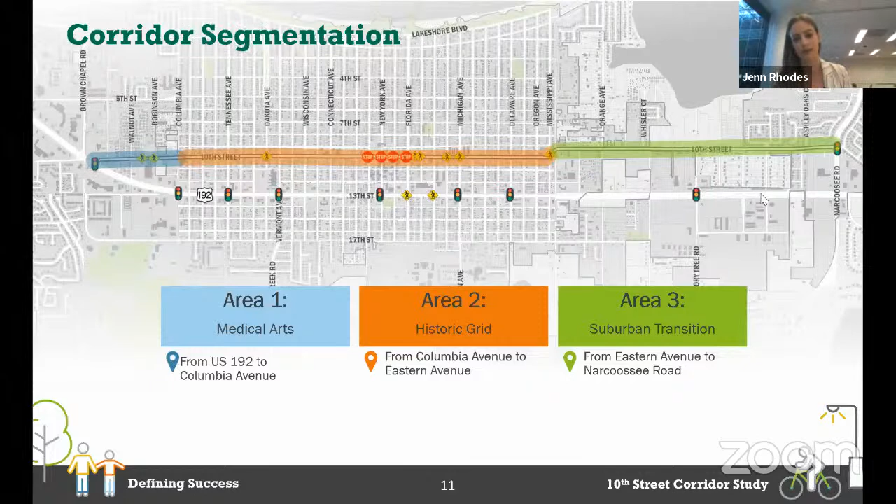As far as the typical sections for each of the segments, starting from the west, this is the first typical section from US 192 to Columbia Avenue. The lanes are pretty narrow out there, 9 to 10 foot lanes with no curb, gutter, or shoulder, they just kind of drop off. There's a 5-foot sidewalk on the north side for part of that segment, and there are some sidewalk gaps, and then there's a drainage swale on the south side.

That segment is within the St. Cloud Medical Arts Campus overlay, which takes up that whole square you can see on the screen. The portion of 10th Street between McKay Street and Columbia Avenue is within that campus overlay, so they've already identified a proposed or future typical section for that segment that looks at adding some on-street parking. We're going to try to take that into account and incorporate it where possible.

Moving on to the second segment, from the historic grid through downtown, we're still at a 50-foot right-of-way, but it widens out to have 8-foot parking lanes on each side, 11-foot lanes, and 10-foot sidewalks. For a small segment between Massachusetts Avenue and Florida Avenue, there are 90% design plans complete, so this is a rendering of what that would look like. They're bricking the streets, similar to the updates recently put in along New York Avenue, with nicer parallel parking, street trees, and maintaining the 10-foot sidewalk.

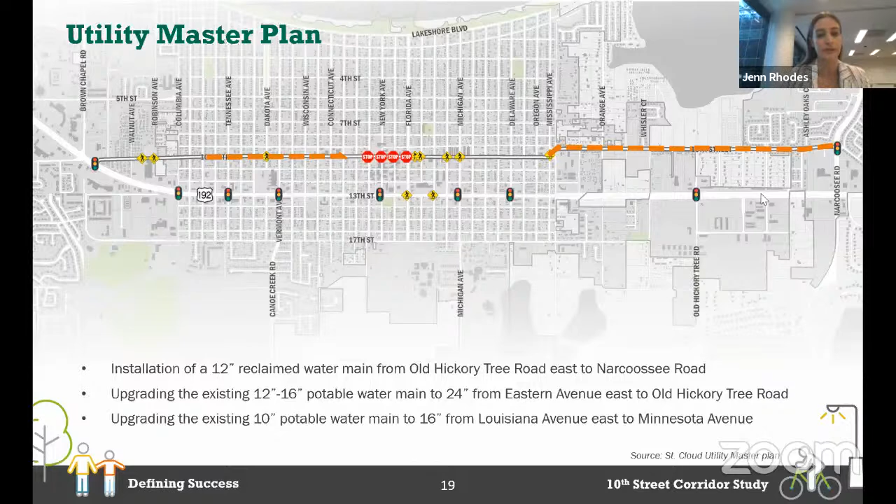And pass it back to Jeff.

Just a final thought on the utility master plan: I know we have someone from OUC on as well today, and we're excited about collaborating because perhaps on some of these studies we don't know that a utility has an improvement planned, and maybe we can leverage that investment they're going to make in that infrastructure capital project at the same time. This really could be one of the purposes of these meetings, so we're excited to have you.

The existing and future land use don't differ too much between the two. The only areas I'd highlight are a little bit more refined vision near the medical arts campus, as well as a bit more of a transition around downtown with some of the properties and land uses. To the very, very east end, there's that big pocket of commercial with the strip center.

From there, we'll talk about population demographics and really trying to understand that. We've used that information to help target our specific outreach to different groups and how they best receive their information, which has really played a big part in our outreach effort to date.

We do note that Osceola County has a larger Hispanic population, but I would note that St. Cloud is actually a little bit less than the county as a whole. But you can see where the pockets of density really are closer as you get closer to downtown.

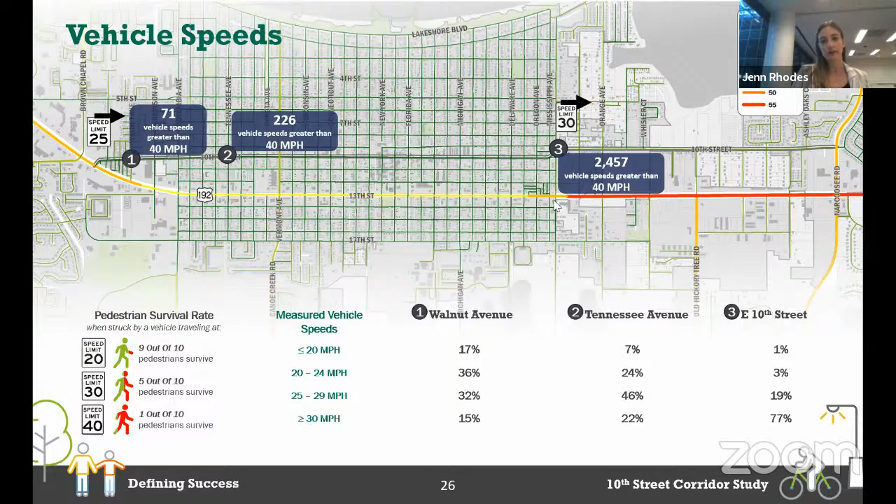Over 50% of the traffic is going over the speed limit, with special emphasis on the number of vehicles going over 40 miles per hour every single day. That number picks up at spot location 3, east of Eastern Avenue, where you have almost 2,500 vehicles a day going over 40 miles per hour. That's 2,500 times where, in the case of a pedestrian crossing, they likely would not survive. This highlights that speeding is an issue along this corridor, even with the narrow lanes that exist today.

For traffic patterns, MetroPlan has a license with StreetLight Data, so we're able to get a good assessment of how the corridor is being used. Not a lot of traffic uses it as an entire through route or corridor; it's being used more as a collector, in combination with several other streets that predominantly feed it. For example, Columbia Avenue and Old Hickory Tree are major corridors people use to access 10th Street, as well as in the core, in the middle, and on each end at Narcoossee and over at 192 at the very western end.

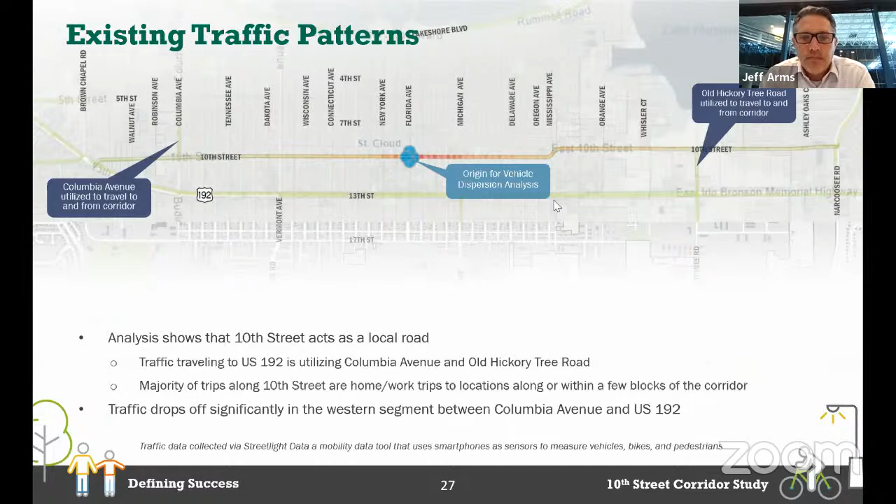For traffic volumes, you can see the range Jen talked about. The takeaway is we looked at both existing traffic and future traffic growth and patterns, and it's been pretty flat as far as volume growth. So we're not looking at needing to add lanes or increase capacity on the roadway. There aren't locations where we need to add turn lanes, even at critical intersections, and there aren't locations showing high levels of capacity constraints. It's really about accommodating the traffic that's there in a safer, lower-speed, more multimodal approach into the future.

You want to talk about the crashes, Jen? Sure. First we looked at all the crashes, and they were dispersed pretty regularly throughout the corridor at the 20 different intersections. Then we took another look just at the injury crashes, and there we could really see some hot spots, so those are intersections we want to pay special attention to in our recommendations moving forward. 34% of all injury crashes occurred at Columbia Avenue, 7% at Michigan Avenue, and 9% at Orange Avenue, so those 3 intersections really stand out when looking at just the injury crashes.

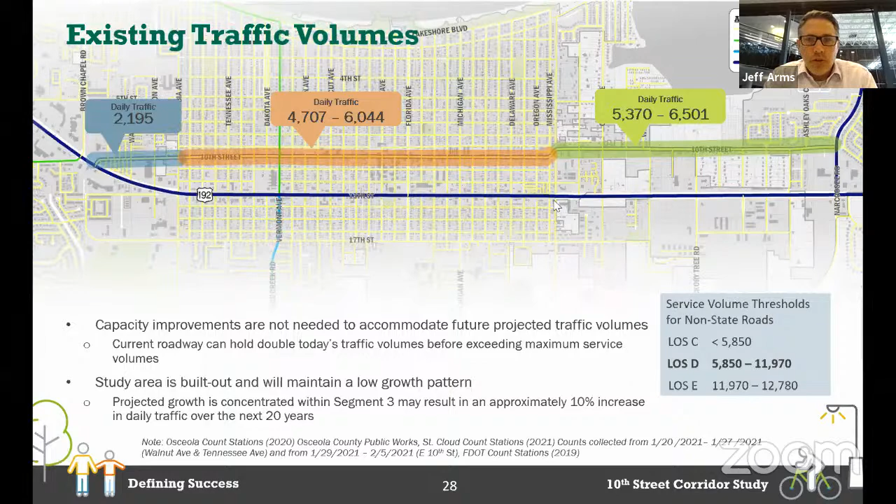That summarized some of what we looked at with existing conditions. At the same time, we had an online survey pushed out to the public, as well as a comment map using Wikimapping. We got 548 responses to that survey, and while it was pushed out through a variety of methods countywide, we did get targeted responses from people really using 10th Street. 80% of respondents said they travel regularly along 10th Street, and around 50% say they live or work on 10th Street.

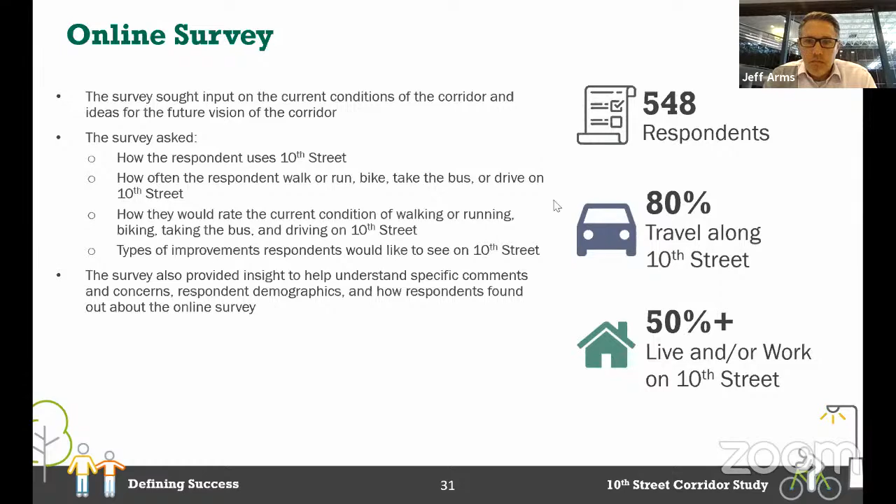Some of the ways we pushed out information about the survey was through social media, Facebook and Nextdoor. We also sent postcards to people within 300 feet of the corridor on both sides - 900 postcards went out that way. There was information about the survey in the City of St. Cloud newsletter, dynamic message boards announcing the survey, as well as other information notices through emails and the website.

One of the questions we asked was how they currently use 10th Street and how they would like to use it. We made a chart showing where the gap is, and you can really see the difference with both walking and riding a bike. Riding a bike is the most significant one, where 28% of respondents currently ride a bike on 10th Street, but 50% would really like to. So there's a lot of opportunity to improve conditions where people feel comfortable riding a bike on 10th Street.

Similarly, one question asked respondents to rank different issues from top priority to lowest priority for what the recommendation should be. In line with the last slide, the top issue they'd like to address is a place to safely ride a bike, followed closely by filling in gaps in the sidewalk, as well as improving the safety of crossing the street and car speeding.

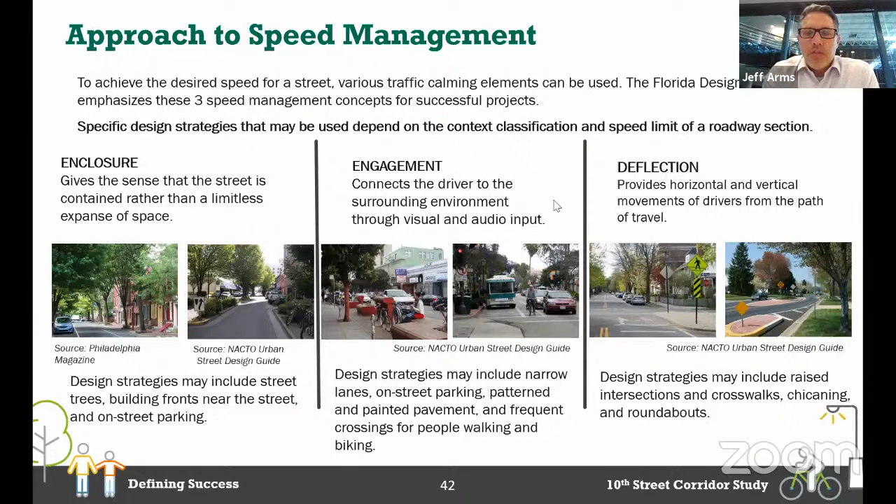So what do these different categories look like, what are some specific examples? Let me show you on the next slide. We tried to give you some different examples of how these categories would work, or some of the tools in the toolbox, so to speak. So we have speed humps, islands, roundabouts, bulb outs, on-street parking, narrowing lanes, short blocks, beacons and driver feedback signs.

It's always kind of tricky when we're talking about a 50-foot right-of-way. Sometimes some of the tools in the toolbox are harder to implement. For example, in a 50-foot right-of-way, roundabouts are a little more challenging. It might end up being more like a neighborhood traffic circle. And what does that look like?

Then a lot of the discussion too is on short blocks - shortening the length of the block. So maybe that's putting in more crosswalks across the corridor, more just reinforcing it's not one long continuous stretch.

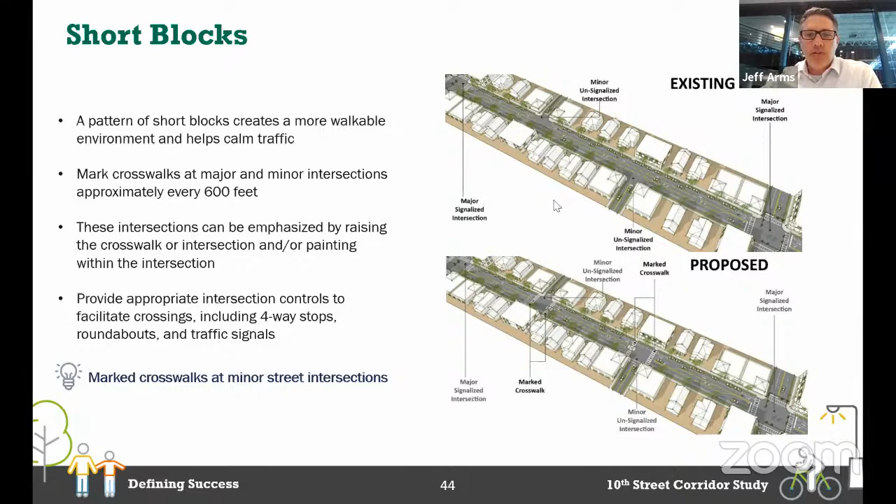That was a comment - yeah, I understand that comment about roundabouts and buses. We would certainly have to consider the design of roundabouts to accommodate buses along the corridor in future phases. I was just making the comment that this corridor being as narrow as it is makes it more challenging for roundabouts to even be a feasible solution compared to other places.

Some other multimodal strategies - we talk about different bicycle facilities, things we can do with transit stops, different painting of intersections, ped scale lighting, fewer driveway connections.

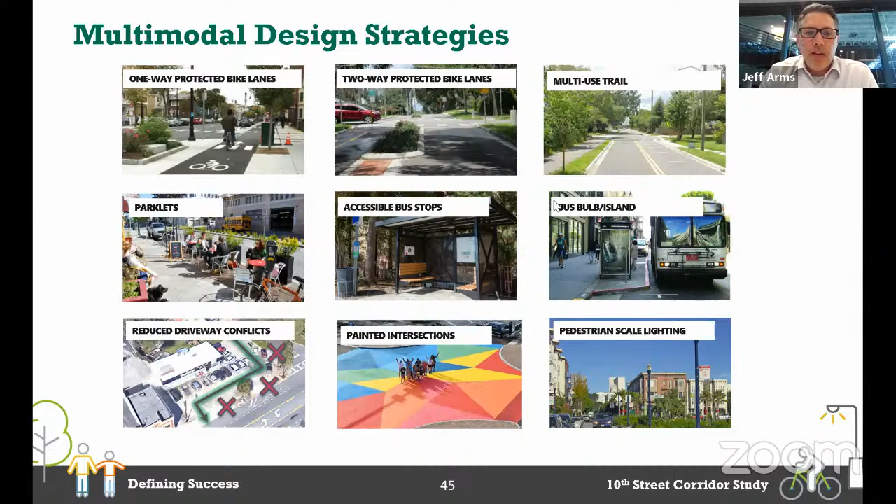So from there, we've covered most of our material. Next steps - we want to make sure we're considering everyone's input and ideas as we formally develop alternatives. What we've heard from the city is that something more urban, meaning curb and gutter type cross section without open swales, is the general direction we'd go. This project and what we're doing in this stage doesn't include a drainage study or detailed utility coordination.

So what we want to do is capture what all the issues and opportunities are, if that's the direction we're heading, so that when the project is developed at the next stage, we're aware of those and have almost like a good playbook of what challenges and opportunities there are going forward.

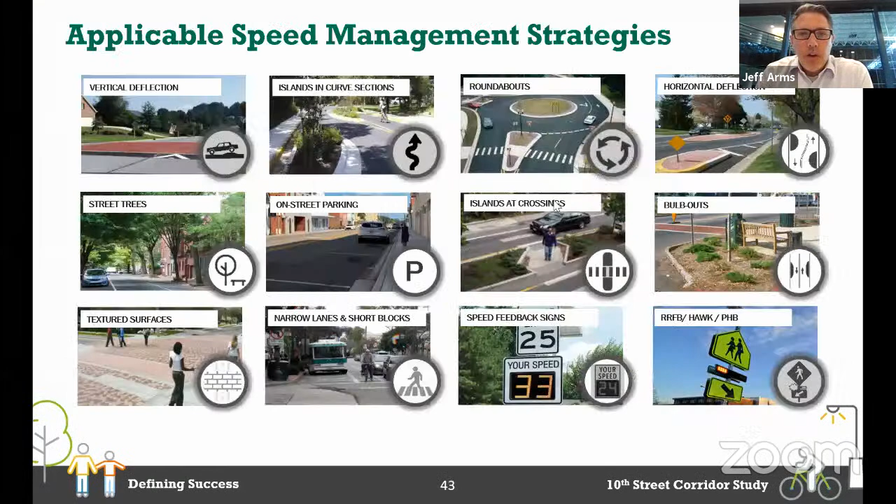With that, I can ask Alex to come back on and chime in, and then we could also go back to the goal slides. I can see some more chats of things people want to talk about. I think we can have people unmute themselves if we want a more open discussion. Or we could go back to the map and talk about different issues almost segment by segment.

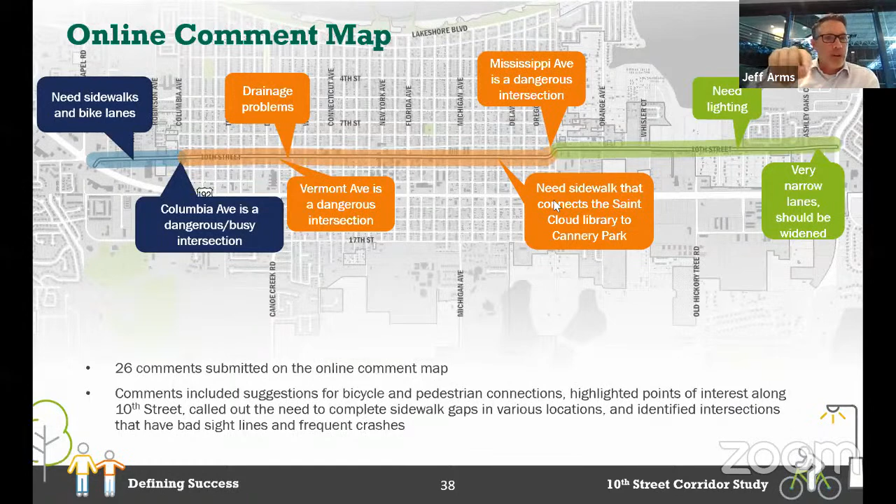We still have about an hour and a half left total, which I don't think we need, but we'd like to have some discussion. Maybe go to the map slide, Jen, like in the segments. Was this helpful? Or how about one of the ones with the stop signs, where you can see the pedestrian features? I forget which slide that is.

So that one, that works. This is a good one. I think this is a good segue point here. And obviously a little challenge with the virtual meeting, with this kind of typical roundtable approach.

But what we're really trying to gain here, as Jeff mentioned, is twofold: insights from your local knowledge and experience along the corridor that may not show up in the data, as we presented, very data informed, coordinated with interested parties. But there's always those insights that can be gained by coming together in this collaborative fashion. So if we can get those segment by segment, great, or any insights at all.

And then second are those goals and objectives, going back to those. So let's take it segment by segment first, but I also would like to build some consensus around those goals and objectives, because I believe they're very important, especially as we get into the latter steps of our work, where we'll use those as criteria in a rubric fashion to evaluate the different concepts being developed and review the different alternatives. So let's keep that in mind.

First, I guess we can take it from the top with insights, but I would like to get some feedback on those goals and objectives. And of course, we will send those out to the project visioning team members, give them a little time to digest. But any discussion and questions we have today would be great to take on. So, members, please, before I start picking on folks.

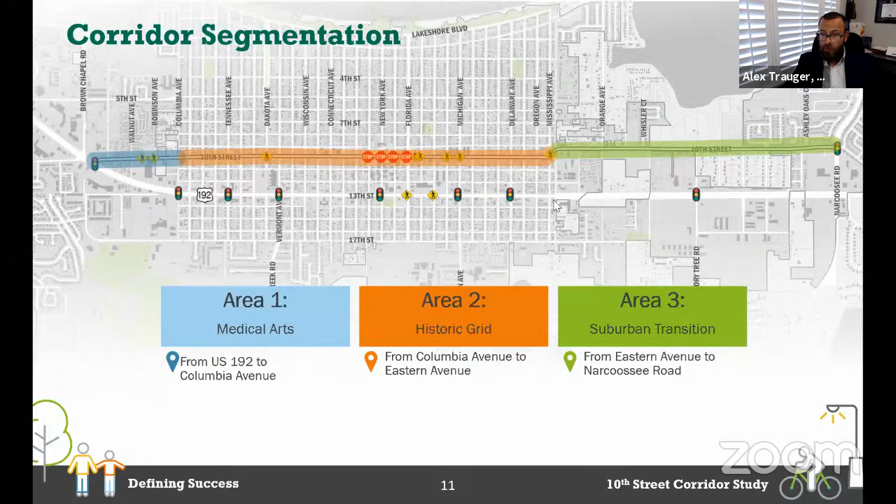I know Beverly's had some really great comments as it pertains to school bus operations on the corridor. So anyone else? Myles, Transit? Hate to pick on you, but I know you, so it's easy. You want to go to the transit one?

I just joined the meeting. I'm sorry.

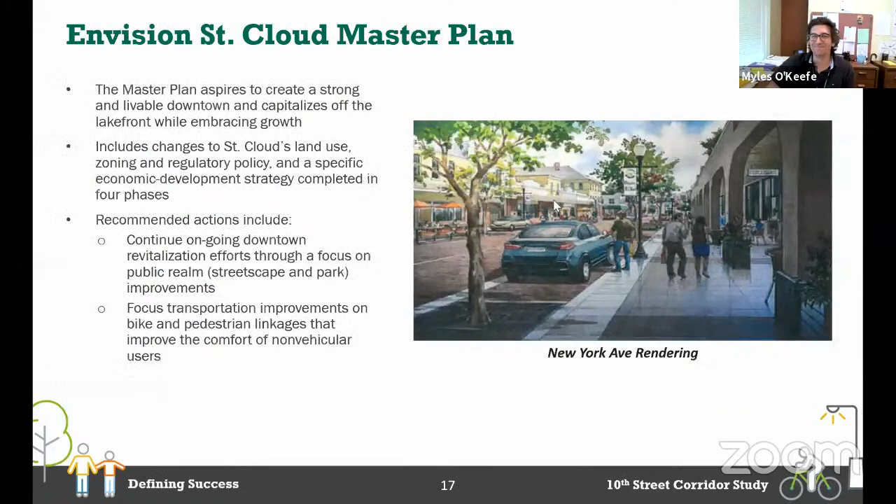This isn't fair. We'll put the couple transit slides on there, Myles. Let me get to the transit slide and we can give you a quick recap of what we said. So this is what we had for the transit slide. Oh, went too far, sorry.

It's currently the Lynx Route 10, pretty good headways and frequencies, 30 minutes and 1 hour on the weekends. But we did make a note that there was a potential, instead of following this looping route, to relocate it onto US 192, and then also the idea of maybe potentially providing a flex route. So anything you can add to that or thoughts about that?

Or just update us on the status of, is this still the current thinking? Yes, that adjustment is still the current thinking. In fact, we at Osceola County's request just put in a service development grant last week for those modifications.

So it would be straightening out Lynx 10 to stay along 192, and then a neighbor link that would provide demand response north and south of 192 to capture those areas vacated, pretty much all the way up to Lakeshore Boulevard, and then south down to 17th Street with the neighbor link. The 192 route, Lynx 10, would run to Narcoossee, and a new route would run along Narcoossee all the way up to the Nemours Hospital in Lake Nona. So there's potentially some big changes, but these would not occur if awarded the grant until December of '22.

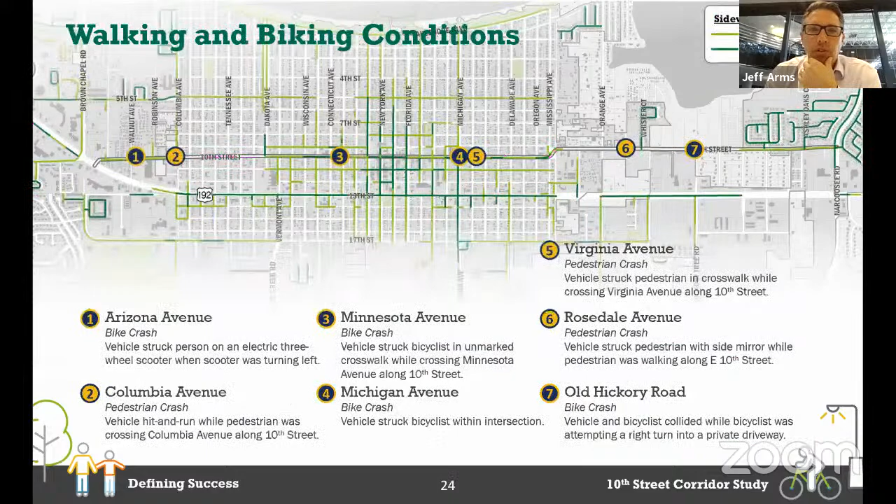Beverly did ask a question about better connections all the way to the lakeshore, aside from a few key corridors for bike ped. I know that's something the Envision St. Cloud Master Plan did have some of those connections. I think you had your key bike ped connections here. Those are the corridors, like Dakota has the bike trail that connects north-south. I think Florida Avenue would be and Delaware. Yep, the main one. All right, let's go back to the segment map, though.

Unless Myles has any last transit things. I'm just typing in the chat the road that it would be turning back on. It's Live Oak Boulevard is the street, right past Narcoossee. That's all. And I see Aaron's comment too, we'll touch on that when we get to that segment. That's great, thank you, Aaron.

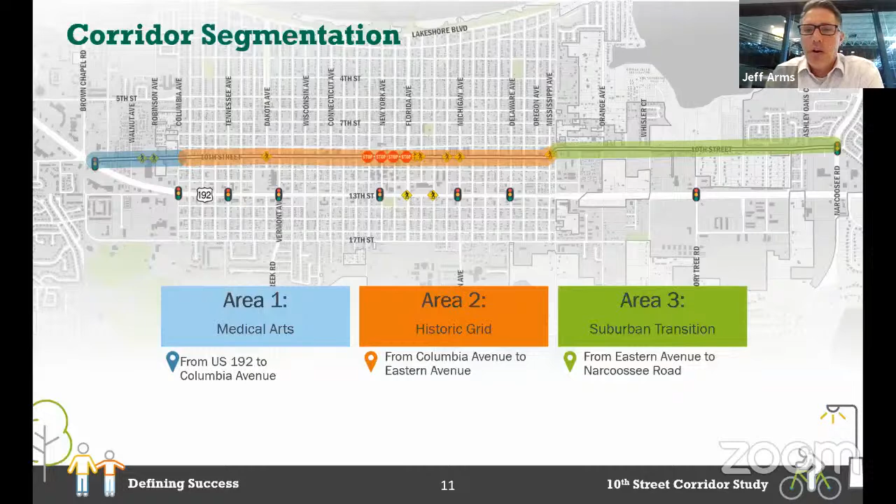Anything else? Go to the next slide, Jen, where we focus on the medical arts. This is the area with a lot of the mobile home parks, and it's transitioning to have a lot of redevelopment potential. Any other thoughts, feedback, ideas on that segment that anyone wants to chime in? I know Columbia is a location where we have a lot of concerns with that intersection.

I had some comments, this is Erin. Just the presence of that intersection at 192, it really is very understated. It's just right-in, right-out. You cannot make a left crossing 192, there's no signal, so it's just a very low-key impression. So the idea that it's this parallel corridor to 10th Street, for someone who's just traveling through, it doesn't give you that impression. And then when you're coming west, I noticed the pavement condition, because the curve is so steep that the pavement is degrading there, because everyone's braking while they're turning. So on 10th Street there, the condition of that pavement is really terrible. I'm wondering, I don't know the extent of the right of way there, if there's anything that can be done at that intersection that might resolve both of those things, or if anyone has talked about that yet.

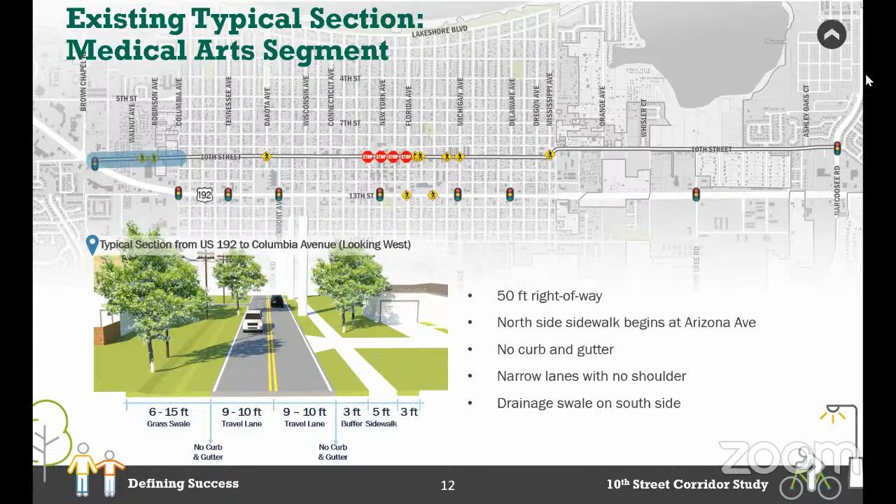But the plan we've got is to do it on both sides as a sidewalk. Well, we're not to the alternative formally yet. This is, I guess, for our study - we haven't looked at what we'd be recommending. This is what was recommended in the medical arts campus overlay. Between McKay Street and Columbia, they have this typical section we're showing on screen with on-street parking and a 5-foot sidewalk on both sides. I would anticipate we'd have some type of pedestrian facility on both sides.

But with a lot of the comments and feedback we've gotten, we can keep this in mind. We've talked about what a bike facility along the corridor would look like - would it be a parallel trail? Ideas like that are kind of where we'd start, since there's limited options in what you can do in a 50-foot right of way. The closest example I'm talking about would be like Bumby Avenue in Orlando - you know how there's the 10-foot path that runs parallel to Bumby itself.

Okay, keep going. So back to the area we're calling the historic grid - there's definitely a good connection at Dakota. That's kind of one of the first main connections going north, and taking into account some of those signalized access points and where the bus stops could be is going to be key. You can see where the very few stop signs are, except for in the core.

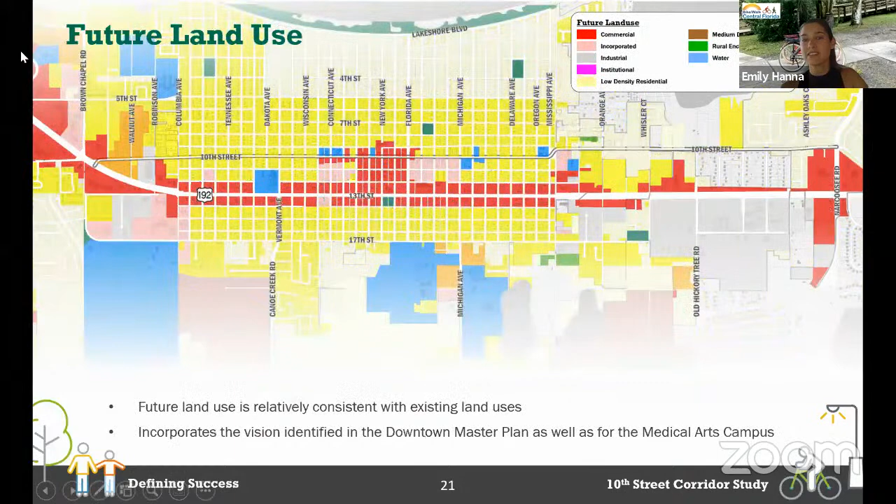Thanks, Emily. Can I just clarify when you said north-south with Florida Ave? I think Miles said their intent is to move the bus to 192. So I'm not sure, what were you talking about?

No, I was just trying to say align the bus stop, maybe put it on Florida Ave and 192, instead of having it off-centered right next to New York, maybe having it on Florida. That way those that ride transit can have a nice, safe facility to either walk or bike to get to downtown Lakeshore, instead of being offset.

Yeah, so the nice part is we get to pick new stop locations. If we're going to 192, we probably wouldn't have as many stops as you currently see now. So I made note, we will look to emphasize Florida as that stop location versus clustering them, because that allows us to put more amenities in one location instead of spreading things out. Probably better wayfinding signage too for those who ride transit but don't know where to go from there - that the Lakeshore Park is this direction, and it's all kind of seamless.

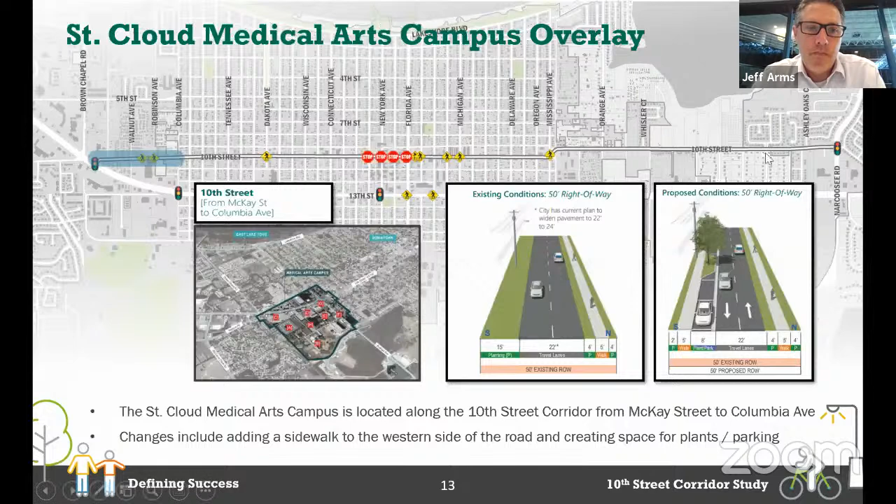All right, so this is segment 2, and if you remember, there's the smaller segment within that, between Massachusetts Avenue and Florida Avenue, where they have this 90% design plan. I think this is an interesting typical section to look at, to see if it makes sense to continue this typical section east and west a little bit further, just that core downtown segment, and also how you would transition from what we have proposed here into this. So that's the gap in between here to here.

Yeah, because when you do get outside of the core of downtown, you generally have a sidewalk on one side, typically, and two travel lanes. And you've got mailboxes and some driveways, but it's not commercial for all that long.

So there's been discussion of whether to still put on-street parking in front of the residential homes, and how you try, if we were to have some type of bike facility, you save a lot in efficiency if you put a trail in, because that also would be width you would have spent for a sidewalk. So by the time you try to do two bike lanes plus a sidewalk, you just start running out of room in 50 feet.

When you do the math of even two substandard 4-foot bike lanes, that gives you 8 feet, and then the sidewalk 5 feet. It just ends up being a lot of space.

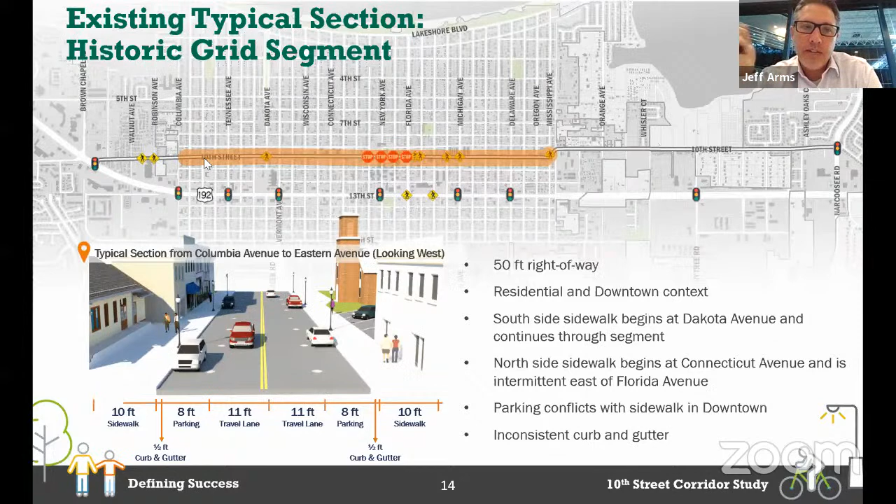So, all right, we'll keep going to the next one, and we can talk about each mode if we need to. So the last segment. No thoughts on segment? Yeah. Any other? We can always come back and talk mode specific, but I don't want to take up too much time.

Well, we have one thing to speak to regarding the zoning in the area on the downtown segment. We have unique zoning regulations that don't require the private sector to bear the load of parking on their lots, so the opportunity for on-street parking is pretty critical. The Central Business District does go one block west of Massachusetts over to Kentucky, and that's on the south side of 10th Street currently. That is just something, if we could capture that last block, I think would be important to the west.

I know there are some opportunities for shared parking agreements and things we're going to be delving into, a little bit east of Florida Ave, one or two blocks. So while the need for on-street parking isn't necessarily there, there are a bunch of churches on the south side of 10th, but we're looking at opportunities to share their parking lots when they're not in session.

So because of the way that we shut down the grid of the downtown area, a little bit of on-street parking just outside of Florida and Massachusetts would be helpful, within reason, within a block or two. But if we were to shut down the portion of the street that only had on-street parking on it, then we don't gain much during those events. So just something to keep in mind. Okay.

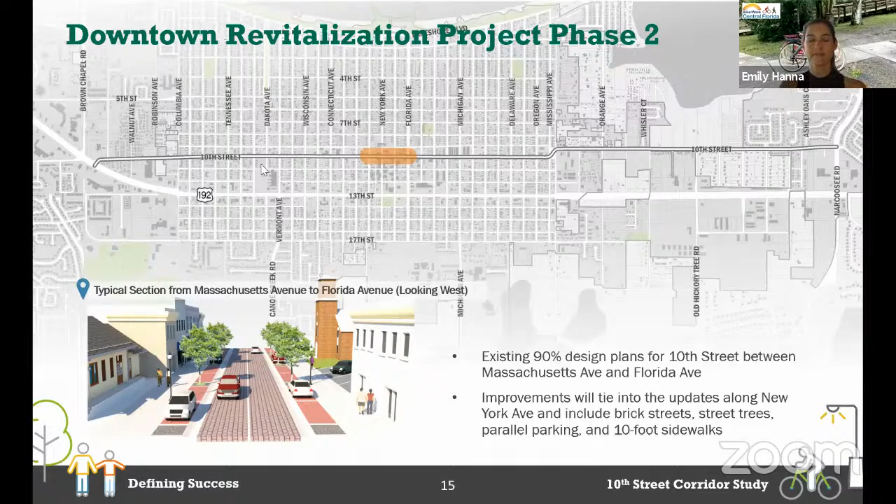Capture that. We have a trails plan that indicates a desire, although locally that plan's a little antiquated. At one point we considered putting a bicycle system on 11th. The challenge is, east to west, it's not a thoroughfare—it has a stop every single block. We could transition the stops, but you'd have to reconstruct every intersection to remove the hump, and it would be very complex, at least through the historic part.

So I don't know if there are opportunities east to west where, in areas that get down to limited right of way, you could do a parallel corridor and transition the bike lane on and off 10th while still keeping it moving east to west. In the past there's been some consideration of keeping them slightly separate and putting different types of facilities on different east-west corridors, but it's challenging to implement given how the intersections are currently constructed.

Costly. Aaron, you were on our walking audit—we talked about this very idea, and you brought up a lot of the same challenges. So that makes sense, we'll consider that too as part of the alternative. There's definitely an opportunity for a bike facility in segment 1 and 3, then transitioning into a parallel bike facility through segment 2, where you're swapping out that space for on-street parking.

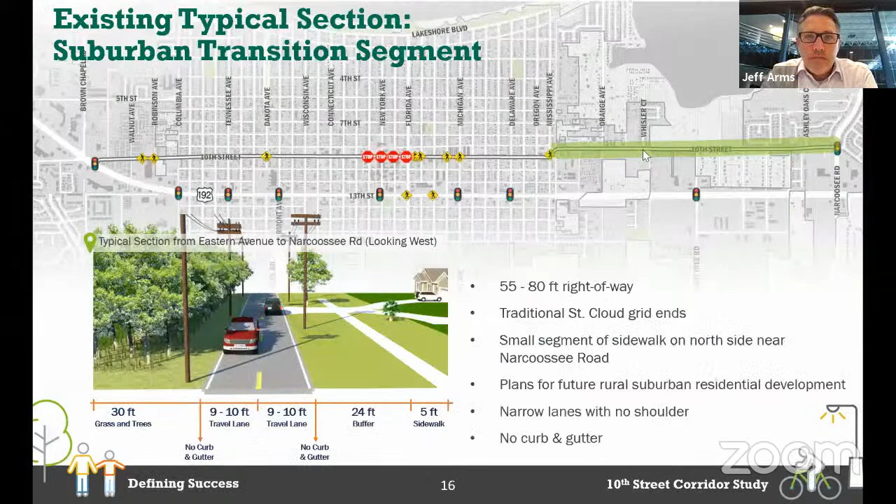Yeah, let's talk about the goals and objectives. As we look at these goals and objectives, I think what's most important are two things. One, if you have concern with anything listed here, any heartburn over anything that's there. And second, are we missing anything? These are grouped based on the highest goal areas based on the public feedback to date. After today, we'll send these out to the project visioning team for last call feedback. But if there's anything for the good of the order that you want to speak to today, we'll definitely take that into consideration.

One thing I'll get the conversation started with: I think I heard today the third bullet under economy, where we talked about considering bicycle pedestrian connectivity between 10th, adjacent neighborhoods, existing and future transit stops, and US 192. I would say we should add Lakeshore Boulevard, like Lakeshore park, and even opportunities for that adjacent parallel corridor as well, connections to maybe 11th Street. I think 11th would be an alternative, but we should call that out. Yeah, definitely Lakeshore, the connection to Lakeshore.

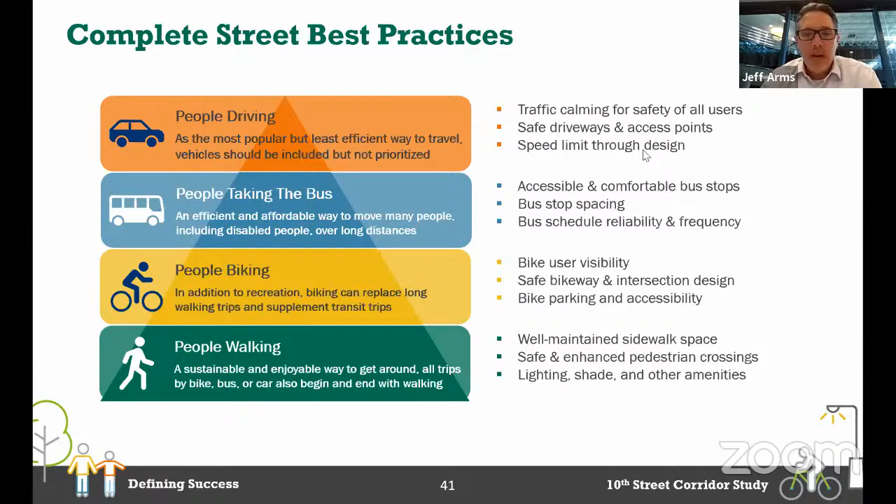I keep thinking about how we'll send this out, you can think of tweaks. I am trying to guard against creating a million objectives to the point where it's too hard to evaluate. So sometimes working that criteria within existing ones is a way to do it too. We're open to ideas.

That's a good point though. Something about seniors, I don't know if we really addressed that. I don't know if that's getting too specific, but I'll put a question mark up. I think vulnerable users is a good general term, because that covers everybody from 6 to 90, right? That covers everybody that's outside of a 2,000-pound vehicle. Does anyone have any others?

I have another question. Dirk, you brought up landscaping or trees. One of the things that's going to happen in the alternatives is we'll have a push and pull between a wider bike facility or more pavement width for users like bikes or peds, versus more room for trees. And we've got power lines, transmission poles, running down the corridor. Sometimes we pave over everything, put in the lanes we're going to put, make the trail as wide as it can be, and then we're left with no trees or landscaping, and we ask did we really achieve everything we wanted to? So when we evaluate and come up with alternatives, sometimes a narrower trail is better because you actually have a decent tree. At least that's my opinion. I don't know that it's really built into these criteria, but thoughts on where trees fit into the mix? I think we can have that in community, maybe.

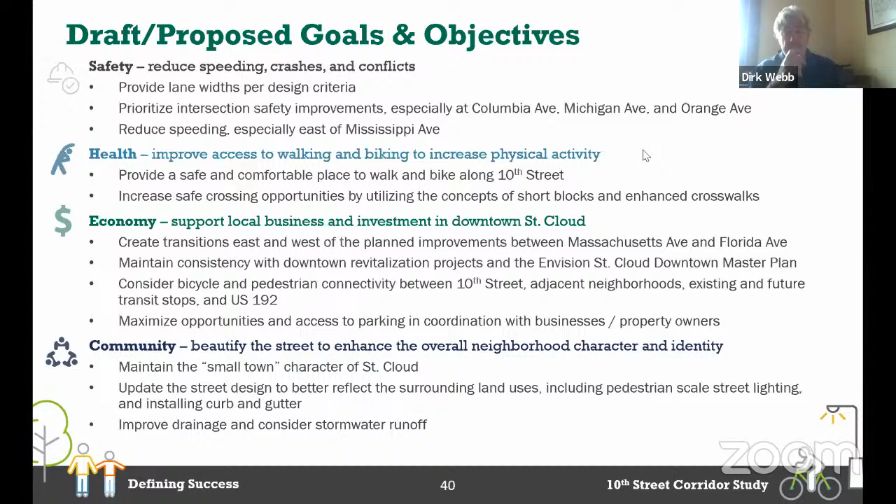Yeah, one of the reasons we added that one in there, in quotes too, was some of the concerns we had in the online survey - don't turn downtown St. Cloud into downtown Orlando, that kind of sentiment. A lot of people said we like our small town and want to maintain it, so we really wanted to capture that. Nothing we're going to recommend is in conflict with that idea - a little bit of a rivalry with Kissimmee there too, and in the comments, we don't want to be them, that type of thing.

I like when people take pride in their community. That speaks volumes. So my only concern is consistency. I don't know if that feels specific enough as a separate bullet under community, but it might, as long as we can still find a way to make it fit on one slide.

That was sort of my criteria of how many bullets, how many objectives are too many. Well, it's got to be on one slide. That's dangerous for an engineer, Jeff. I know, we could just make it smaller font and violate all of Cynthia's rules.

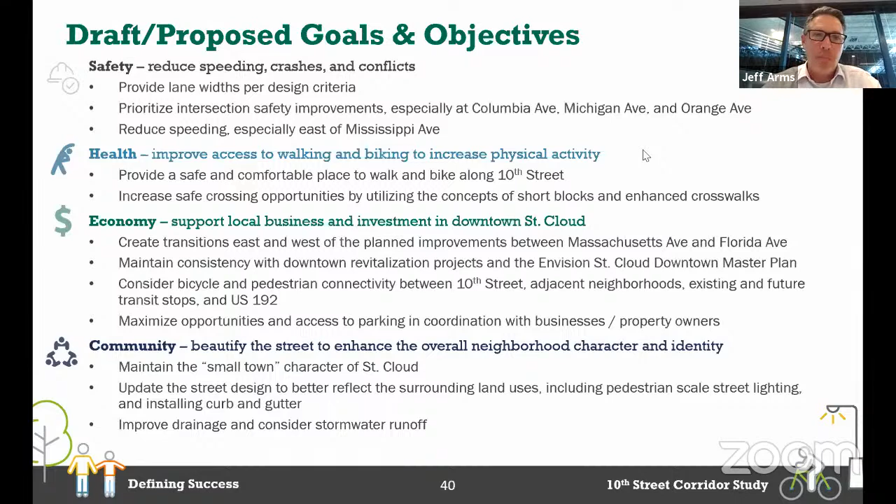On this, the way we're doing these reports, or the product working with Alice, is this is intended to be a little bit more content than a normal PowerPoint, so that if you get the slides later, you have the material to go back and explain to others what we're talking about. And then this is the documentation of the project, instead of giving you a separate standalone report that nobody remembers and reads as much. So it's a little bit of a hybrid.

I guess I'm curious. One of the things that I find that's done so well on 10th Street is the way they've done the landscaping is not huge masses of trees at the corners, but trees that are overhead. But if you've got to wait for a couple cars to pass, you're not standing in the sun.

And I'm curious if there's an opportunity to keep that kind of brand, the look of a pedestrian crossing, further east and west outside of the downtown. So it's almost like little entry features, but only at places like Dakota or Florida, where there might be more pedestrians crossing, and they would look forward and see that if I don't cross now, people will expect me at the next intersection.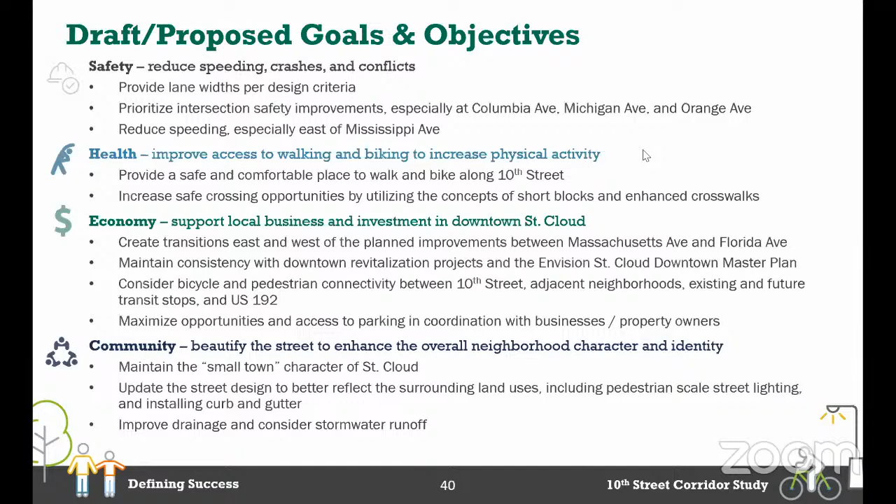Kind of highlighting those gateways of... where are we at?

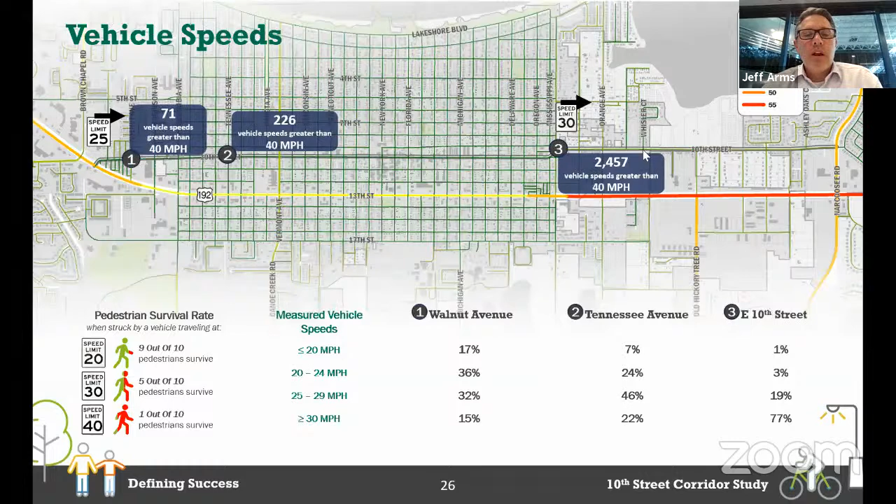Yeah, one of the things I think is kind of an interesting change is I feel like as engineers and planners, sometimes we've got to concentrate all the pedestrians to cross at certain locations so the drivers expect them at those locations.

But then I also find it interesting with the new DOT design manual, now they're reinforcing more crosswalks, more shorter blocks on the entire corridor. So in a way, DOT is recognizing that the design technique of just focusing the pedestrians at certain crossing locations is not necessarily the only way to go with the approach on the corridor.

Which I thought was kind of interesting, because if you look at the number of crosswalks, there's long stretches through here where there's not crosswalks. I think especially with the 25-mile-per-hour design speed, you really could be expecting pedestrian crossings kind of throughout this gridded network.

So I think we can move on. What we're going to do, as I mentioned before, is take the feedback we got from today, obviously put a summary together, which I'll talk about in a second. But as it relates to goals and objectives, we'll send you an updated version based on today's discussion, and we'll get your feedback on that, and we'll provide some context as well. So I think that was some good additions and insights there, to help us provide a little more focus to the work we're doing.

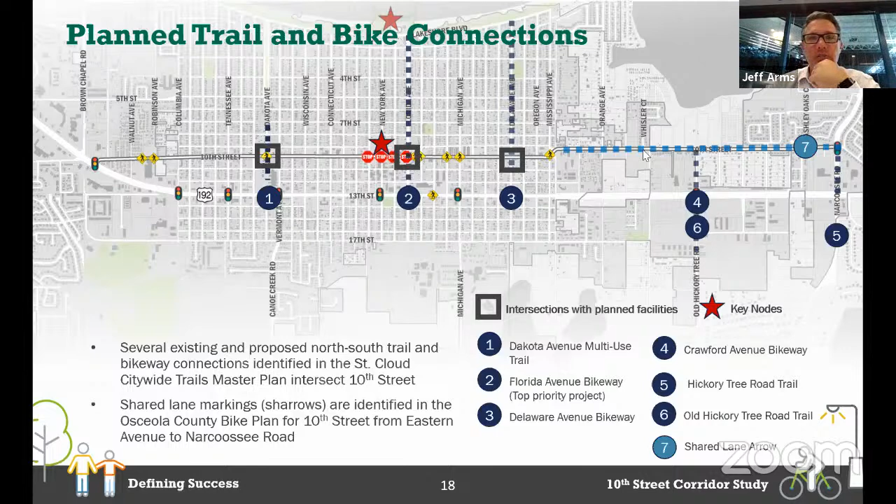Jeff, why don't we go towards the end of the PowerPoint? Yeah, I think we covered all the next steps, Alex, was the... oh, I'm sorry, we also have a couple more slides. We have the public comment, sorry.

Yeah, before we get into that, let's go back to the process slide. I just want to note, the majority of the partners we have online today are our city or county staff. But we're going to be using this project visioning team a couple more times throughout the planning process. We're going to be meeting with some other groups in a pop-up fashion, but also kind of commission in a more formal sense, or council rather, as we have something to chew on.

So like I said, we're going to be sending out those objectives for your review, and I'll provide a timeline for getting that feedback from you, just so we can keep moving through the process. But we will be in touch again with a meeting summary, in addition to getting your final feedback on those objectives. But as you can see here, the intent is to wrap up really in the next year.

But we're going to be keeping public engagement occurring throughout, at important milestones for this. And like I said, we'll be coming back to this group along with some other local stakeholders throughout the study process. So before we move on, we do have a public comment section, but I just wanted to give a shout out to city staff. This, like I said early on, Metro Plan Orlando, we're utilizing our general planning consultant to conduct this work, but it really, the St...